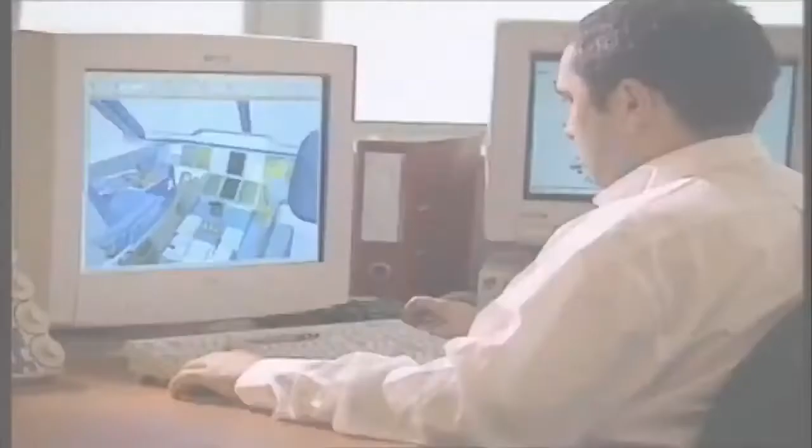It's a mega plane, bigger and heavier than any other passenger plane in the sky. It will hold more people than any commercial jet flying. Designers have spent billions. Now is the moment of truth. Will the world's biggest passenger airliner survive its maiden flight?

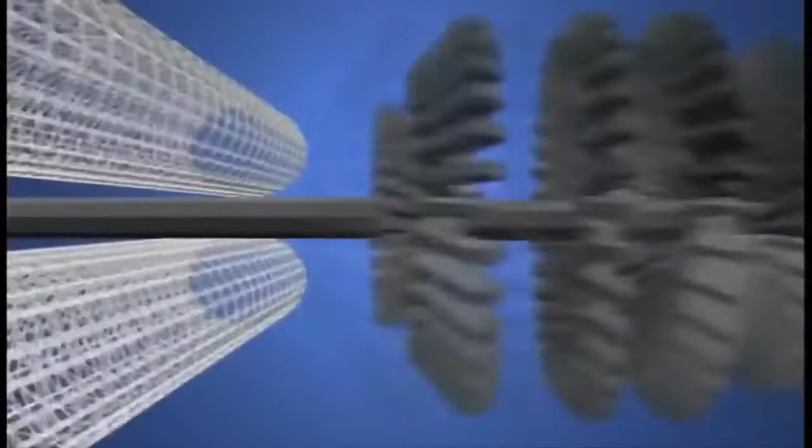An early spring morning, clear skies and a light breeze over southwestern France. Crowding the fields that flank Toulouse International Airport, 40,000 spectators, backpackers, campers and journalists from around the world. All vying for the perfect spot to watch the maiden flight of the Airbus A380, the largest passenger plane ever built.

It's 73 meters long, 7 stories tall at the tail, almost 80 meters from wingtip to wingtip. Heavier, longer and taller than a 747, with 2 full levels of seating, enough to hold over 550 passengers.

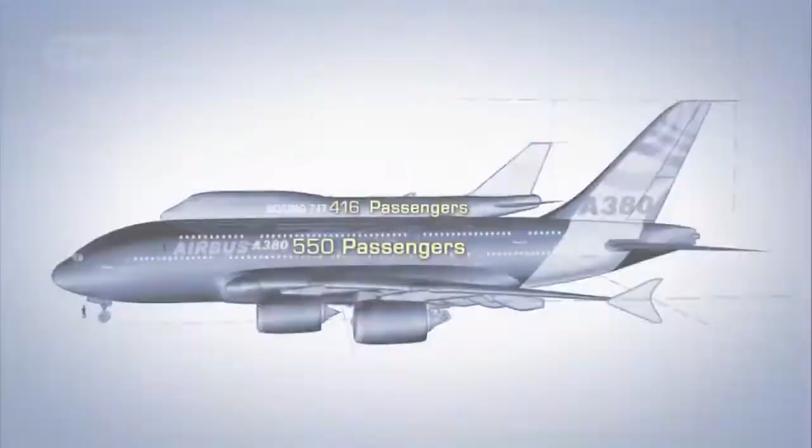Getting this monster off the drawing board required new, super lightweight materials, 4 powerful new mega-sized engines, massive new factories across Europe, and a computerized flight control system more sophisticated than any other in commercial aviation.

This moment is the biggest gamble that the company has ever taken. A $12 billion investment, the company's entire future, and the lives of future passengers all ride on the success of this historic test flight.

Alongside the runway, a hush settles over the crowd as the megaplane comes into view. Gradually, it gathers speed, accelerating to reach its takeoff velocity of 269 kilometers per hour. Then, as it nears the end of the runway, the moment of truth. The massive nose tilts skyward. A sliver of daylight appears beneath the rear wheels, and the Airbus A380 takes to the sky for the very first time.

The engineers and technicians in the crowd breathe a collective sigh of relief. Their baby is flying. The question now is, does anyone want a plane this big? Will the unprecedented size prove a boon or a boondoggle? Is this super jumbo the future of commercial aviation? Or the biggest white elephant since Howard Hughes built the Spruce Goose?

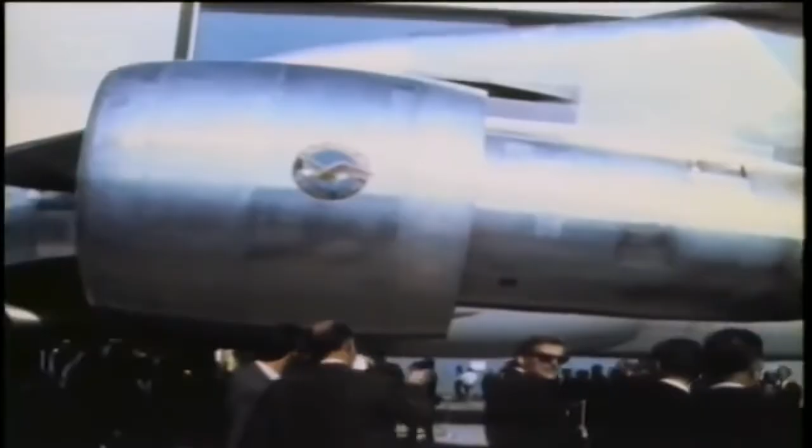1969 was a year of technology firsts. That year saw the arrival of 2 exotic new airliners. Boeing rolled out the 747, the first double-decker passenger plane, larger and heavier than any other. Powered by 4 Pratt & Whitney JT9D engines, providing a total of 186,000 pounds of thrust, the plane had enough oomph to carry more than 400 passengers and their baggage, more than double the capacity of the 707. The plane wasn't an immediate hit, but eventually, it took off.

The Concorde is here. That same year, Aerospatiale and British Aircraft Corporation, the precursor to Airbus, introduced the Concorde. While Boeing was bulking up, Europeans were getting small, but very fast. The Concorde traded capacity for speed. The plane carried only 128 passengers, but it could cruise at twice the speed of sound, cutting the trip from New York to London from almost 8 hours to just under 3.5. Both the 747 and the Concorde came to be the epitome of luxury in air travel.

These two differing visions came to symbolize a fierce rivalry between American and European aerospace giants. A rivalry that's only intensified with time, even as the business of air travel has changed dramatically. The Concorde, after years of financial difficulties and a devastating crash in Paris, has been grounded. And the 747 is now an aging workhorse, noted less for style and more for the sheer number of passengers it can pack between its wings.

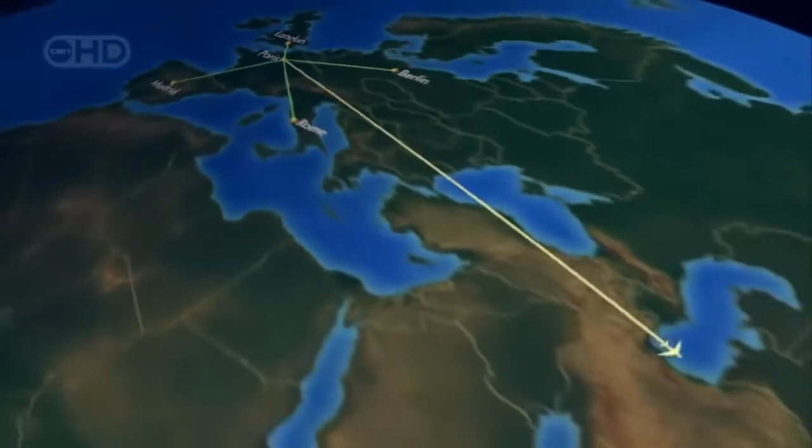The A380, though, is an altogether different order of beast. It's designed for hub-to-hub travel. Passengers will board a small plane near their home, then connect at a major airport to a larger plane, travel halfway around the world, and get off at their final destination. It's a strategy specifically designed to serve the most rapidly expanding long-haul routes in and out of Asia, and to cater to customers who appreciate a bit of pampering.

The plane's sheer size, with 2 passenger decks, is large enough for both standard seating as well as more luxurious features, like a lounge, a high-end shop, 2 staircases, even a waterfall. It's a breathtaking dream. But no one knew if such a plane could be built. Some argued that such a craft would be far too heavy and expensive to be practical.

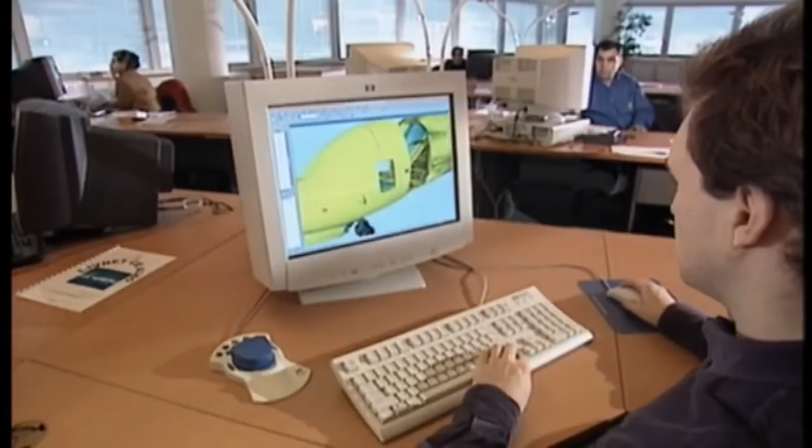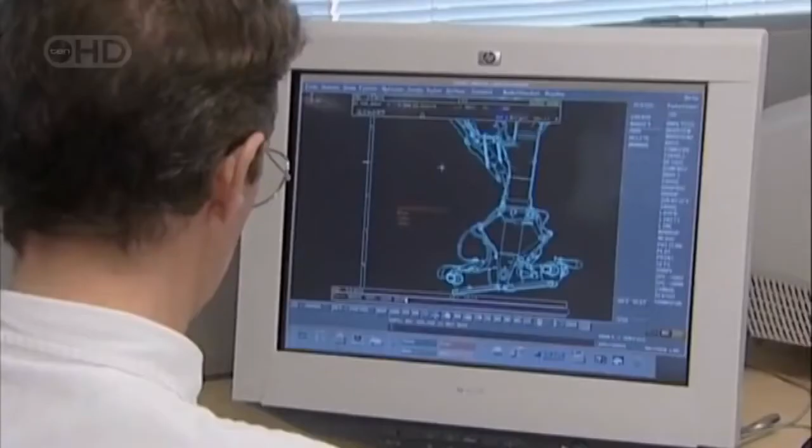But a tenacious and aptly named Airbus executive, Charles Champion, wouldn't take no for an answer. He encouraged his design team to think outside the box. Yeah, well, there were lots of weird designs. Some looked at the double bubble. One of their first ideas, the double bubble, a double-wide fuselage. It looked promising, but computer analysis showed that it would be far too heavy and not sufficiently aerodynamic. So Champion sent his team back to the drawing board, and eventually they came up with this history-making concept.

A full-length, double-decker passenger cabin, with a third deck below for cargo. Space-wise, it's the equivalent of 2 complete wide-body cabins, one on top of the other. The new plan called for an aircraft only 2.5 meters longer than Boeing's 747. It was 15 meters wider and 5 meters taller. But when they ran the design figures through the computer, they had a shock. The plane was far too heavy.

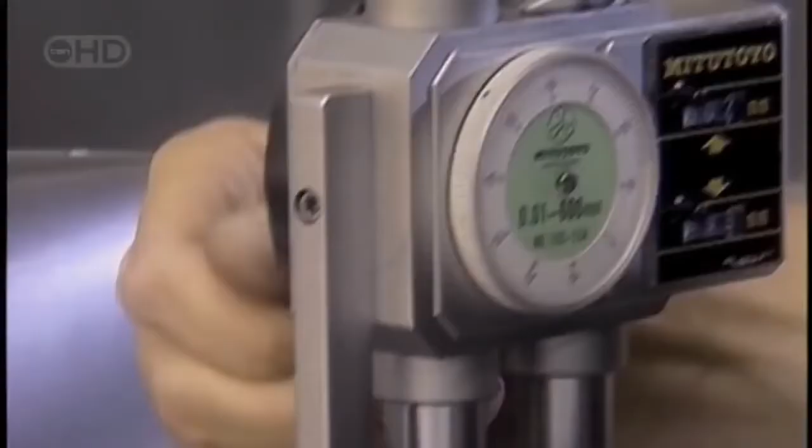And we came up with horrid figures, saying, my God, this is the weight of the aircraft, doesn't work. So what we did immediately at the launch of the program, or 2-3 months afterwards, we launched a very strong challenge on the weight. The team set out to bring the base weight of the aircraft below 277 tons. That's only about 50% heavier than the 747. An ambitious goal for a plane designed to carry over 100 more passengers and their luggage halfway around the world. Unless Champion and his engineers could find the means to beat that target, the dream would die.

Airbus engineers were faced with a design challenge that called for a lightweight plane carrying over 550 passengers at a lower cost per seat, not to mention quieter and less polluting than anything in the air. The design team knew they would have to rethink everything. They needed lighter materials, more powerful engines, larger wings, even bigger and smarter factories. Every component would have to be scaled up from supersize to mega size.

But even while the engineers were still scratching their heads over the details, the Airbus sales force was already hard at work, seducing customers with visions of the future. They created a full-sized interior mock-up that promised passengers in coach some relief from the grind of travel, with seats an inch wider than in other planes, and overhead bins 10% larger.

Each plane can also feature a new interior illumination scheme to eliminate the upsetting effect created when flight attendants suddenly switch on overhead lights. The kinder, gentler system in the A380 mimics the gradual transition from day to night and back to daytime again. These and other innovations make the plane distinctive, but it's the promise of opulent luxury that really turns heads. To help build excitement, computer programmers constructed a virtual showroom where airlines can bring to life their wildest design fantasies.

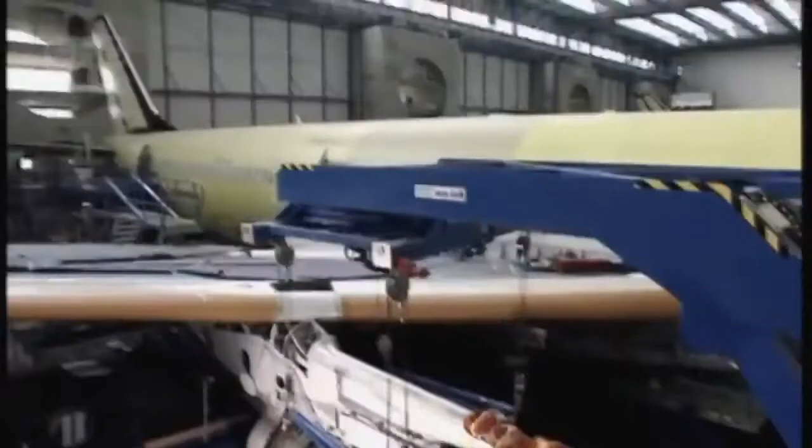Of course, no dream could take flight until engineers came up with a way to lift all that weight. In late 2000, builders finally settled on a design. For power, they would buy engines built by Rolls-Royce, capable of providing 30% more thrust than the engines used on the 747. Each massive power plant cost $15 million, as much as a ton of gold. Altogether, they account for almost 25% of the cost of the entire plane.

But if there's one thing this aircraft needs, it's thrust that won't quit. Each engine provides up to 80,000 pounds of force. Running at top speed, this mega guzzler sucks down a litre of gasoline every second. The A380 is designed for routine flights lasting 13 hours or more. That means when it's fully tanked for takeoff, the A380 carries a lot of fuel. 260,000 litres, 20% more than the load carried by the 747.

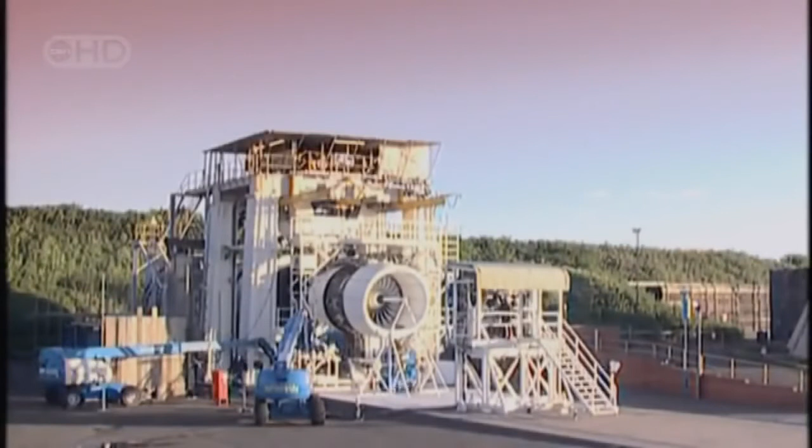Just imagine what would happen if anything threatened the integrity of one of those fuel tanks, like a catastrophic engine failure that sends shards of metal tearing through them. That's the nightmare that haunts engineers at Rolls-Royce, and they're about to destroy an engine to make sure it never occurs.

These 24 titanium fan blades suck air into the maw of this A380 engine. Each blade is 1 meter in length and weighs 15 kilograms. Lightweight, but super strong. When the engine is roaring along at full throttle, the blades spin at almost 3,000 revolutions per minute. The centrifugal force at the tip of each blade is equivalent to the weight of a 110-ton locomotive. If one of these were to break off and escape into the engine, it could wreak unimaginable destruction to the plane.

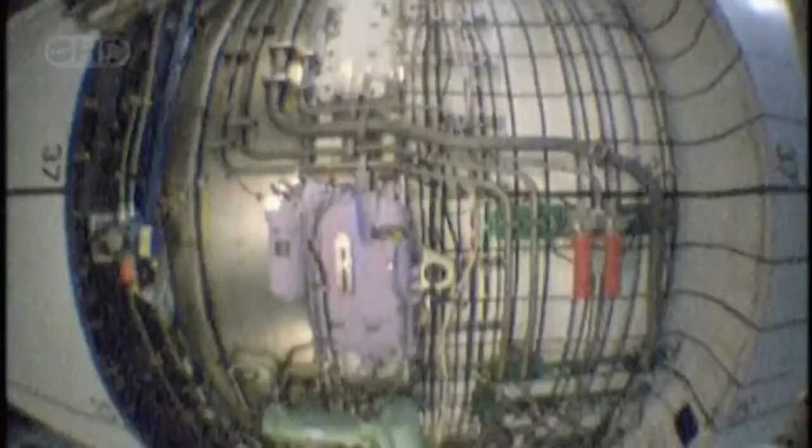That's why Rolls-Royce engineers are about to conduct an engine failure test. They're going to intentionally cause one of the fan blades to break off at full speed in order to prove that the engine enclosure can contain the damage without letting any metallic fragments escape. In the process, they will totally trash this $15 million engineering marvel, a small price to pay when the lives of over 550 people could be at stake.

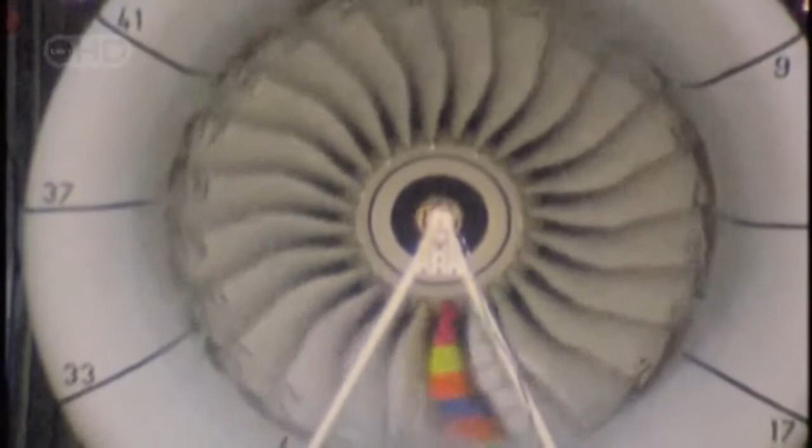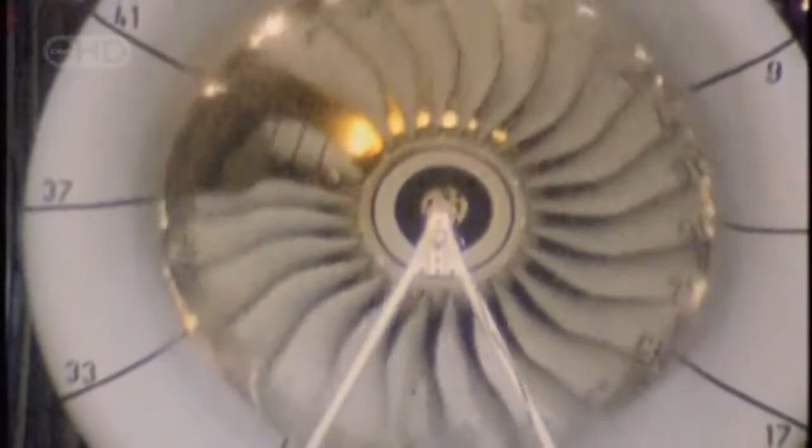A super slow-motion camera captures every moment in excruciating detail. The blades are striped to make visual measurement easier. When the fan is spinning at full speed, engineers send a signal to explosive bolts at the base of the multicolored test blade. Faster than even this camera can see, the knife-like piece of metal shears off and flies into the engine mechanism, wreaking havoc, but no fragments escape. The A380 engines are safe for flight, but there are many more pieces to the puzzle. Every other major component would have to be designed from the ground up.

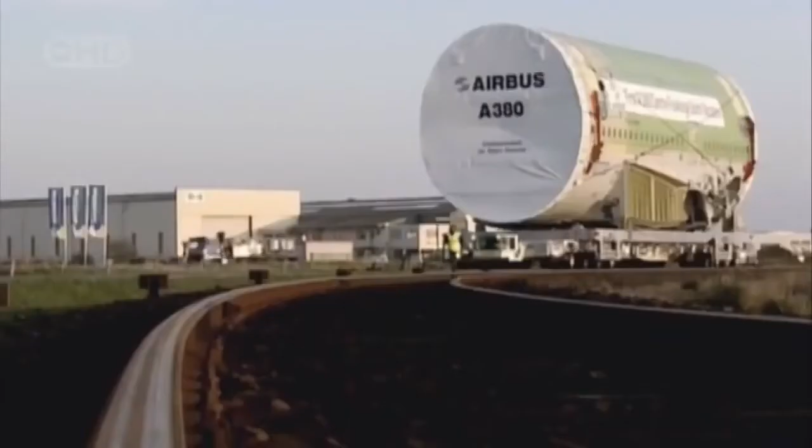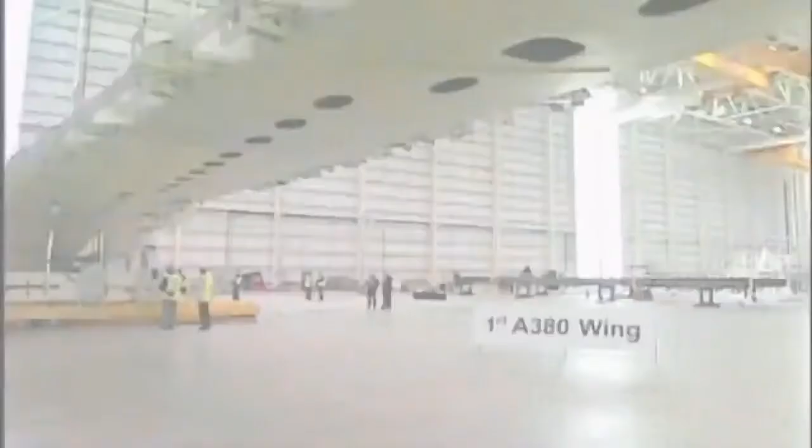Luckily, Airbus has already turned the world into a giant mega factory, with 1,500 suppliers and facilities used to build its existing planes, scattered over 30 countries, yet tightly linked by an advanced communication and transportation network. To assemble the hundreds of A380s the company hopes to sell in the coming decades, planners settled on 5 countries to build the major components. Wings in Wales, engines in England, the fuselage and vertical tail section in Germany, the horizontal tail section in Spain, and of course France, where all the pieces came together to assemble the finished plane.

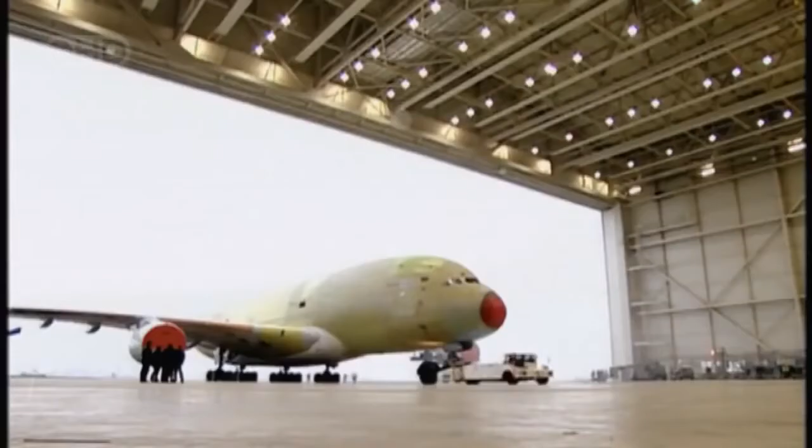The process begins in Wales, in 2 huge new wing factories, built to assemble the largest and most structurally complex commercial airplane wings ever designed. 32,000 components, shipped in from every continent except Antarctica. The wings on the A380 are true mechanical marvels. They provide flight control and enough lift to carry the fuselage, plus the 4 supercharged engines, each weighing nearly 6.5 tons. And with 260,000 liters of fuel loaded inside 10 interior locations, the wings are also flying fuel tanks. They're one of the most critical structural components in the entire aircraft.

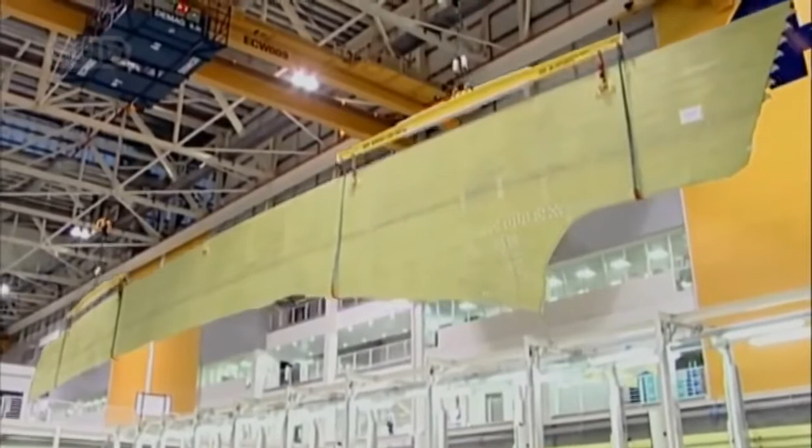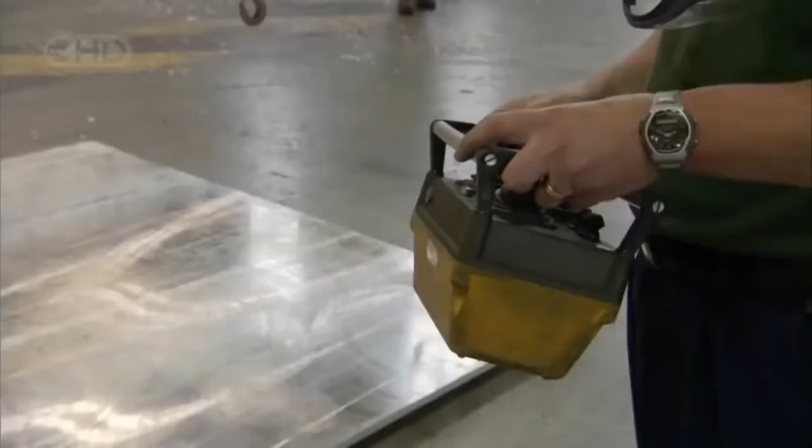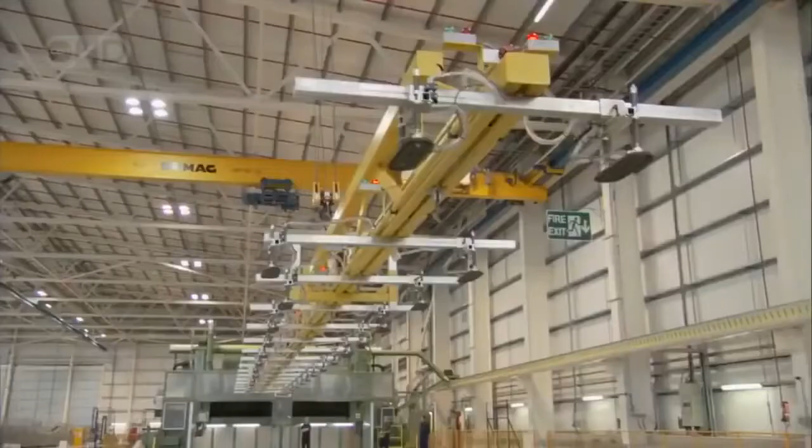The precision construction process begins with sheets of aluminium. Destined to be shaped into the 10 panels that cover each wing, each piece has its own shape and weight requirements. To whip one up, just follow 3 not-so-easy steps. Shave it, shape it, then bake it. This 34-meter-long slab of aluminium weighs in at 5 tons. Way too heavy for the wing panel it's destined to become. In its final form, it will weigh close to 1 ton. So off it goes, to get the aerospace version of a tummy tuck. Overhead cranes use 32 powerful suction nozzles to lift and transport each aluminium slab.

Tim Fernifer carries the burden of responsibility. Using a remote-controlled steering device, Tim guides the 5-ton piece of metal across the factory floor, but he can't do it alone. His team must watch the motion of the wing panel throughout the ride.

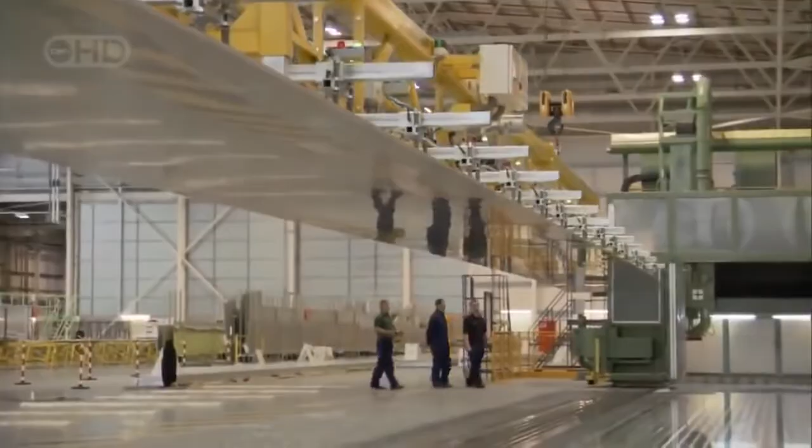You've got to be particularly careful when I'm handling it. I can't see down the other end, so I need another pair of eyes down the other end. It's just health and safety issues. You have to watch, make sure everybody's out of the way when it's actually moving. It's a dicey ride across the factory floor before the huge sheet can settle safely into position.

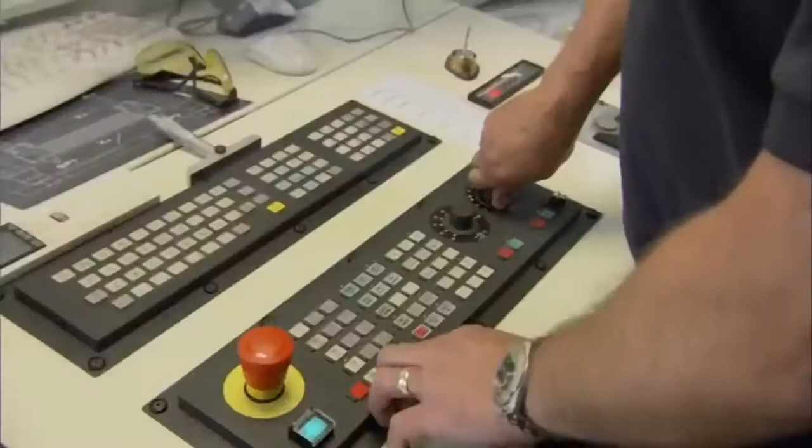A milling machine 40 meters long. Like an oversized cheese grater, the precision cutting head slowly cuts back and forth across the surface of the wing, painstakingly shaving the aluminium until the panel shape matches the 3D contour map stored in the machine's computer. The process takes up to 3 days. It eliminates 75% of the panel's weight while maintaining its strength.

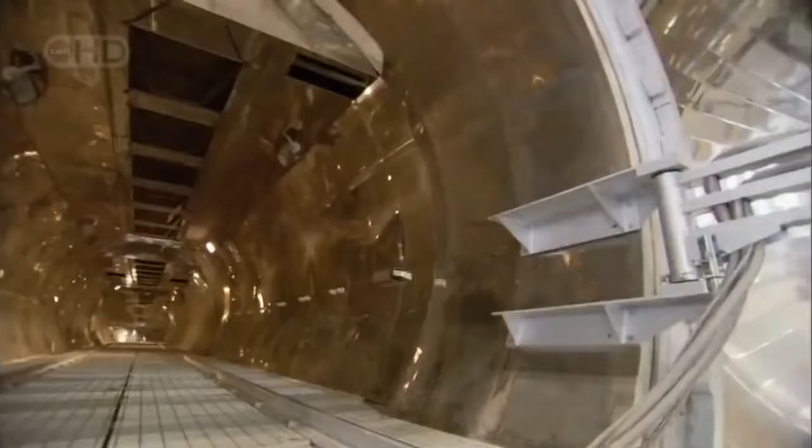Then it's ready for the oven, one of the world's largest pressurized heat chambers, 42 meters long, almost 6 meters wide. Technician John Massey has cooked plenty of wings for smaller Airbus planes, like the A320. It's a challenge to see it go from the size of the 320 to the size of the 380. It's a huge, huge jump. The A380 wings are 50% larger than A320 wings. That means a 50% greater chance of error in this critical process.

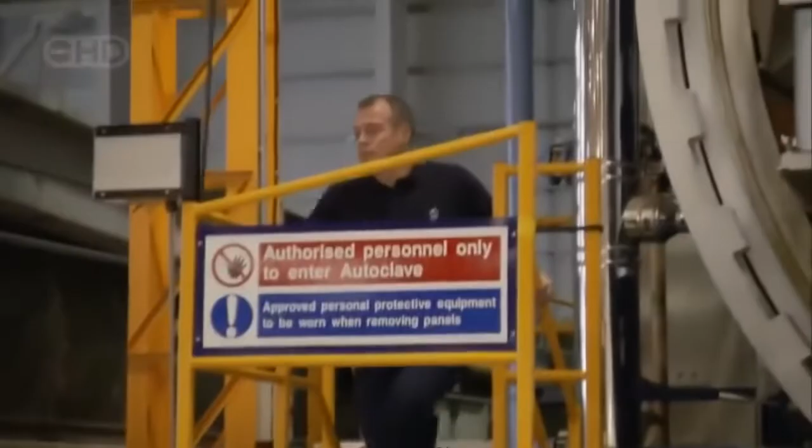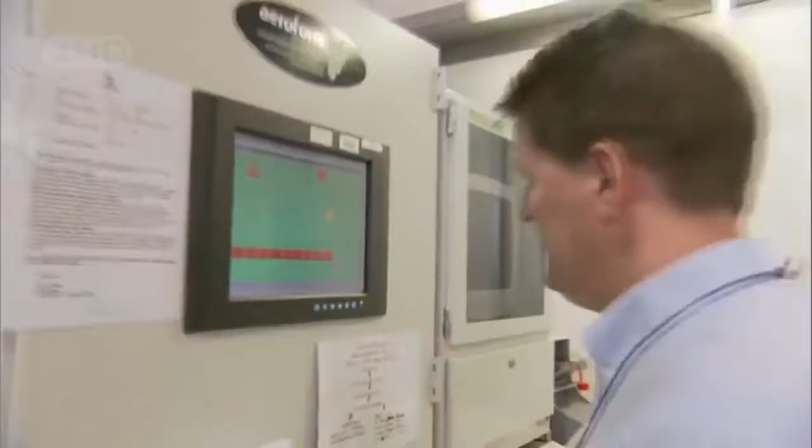Baking requires careful setup. First, Massey and others place the segment in a special metallic form. Then they vacuum seal the entire assembly with a massive piece of plastic shrink wrap to protect the metal from contamination. Inside, the heat must be uniform across the entire panel, 150 degrees centigrade, with no room for error.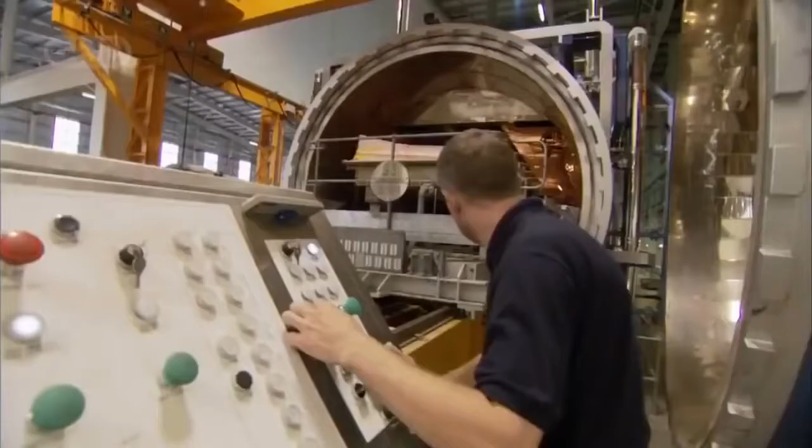We try to avoid any changes in the vacuum or the temperature, so the temperature must remain constant right throughout the process. It must maintain within 3 degrees, otherwise the run is invalidated. After 24 hours, the panel is ready. Specially equipped vehicles rise up and move into place in front of the oven.

All eyes are on the plastic protecting the wing panel. If it breaks, the aluminium wing piece is compromised. A disaster. The entire wing panel would be worthless. If the bag bursts, it means starting the job again from scratch. Anxiously, they scan the surface for any breach. At last, the wing is cool enough to touch. And good news, the bag appears to be intact.

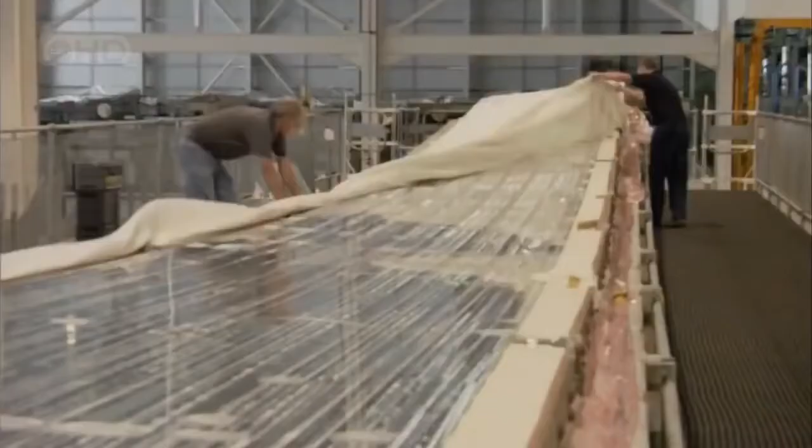Finally, the wing segment arrives in its docking bay. Here, the technicians first remove the plastic and cloth wrap. Now begins the tedious search for flaws. John's boss, Gareth Williams, arrives to inspect the piece. He retrieves small metal rods that were baked onto the top of the wing panel. Each of these cylinders tells an important story about future safety.

These are test pieces which are made of the same material as the wing panel, and we use them to confirm that the heat process that this part's just gone through is correct and it's to the right specification. When this testing phase is complete, Gareth and John get the okay to move the wing to its next destination.

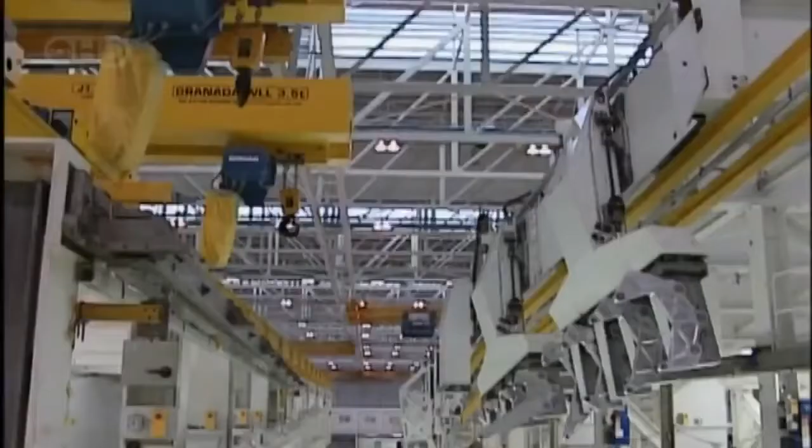The nearby wing assembly plant, an enormous brand new factory located just up the road. It's one of Britain's largest industrial buildings built in this century. It's nearly 85,000 square meters in area, equal to 12 full-size football pitches. This is where the builders attach the aluminium skin panels to the wing skeleton. George Lee guides his team through the tricky assembly process.

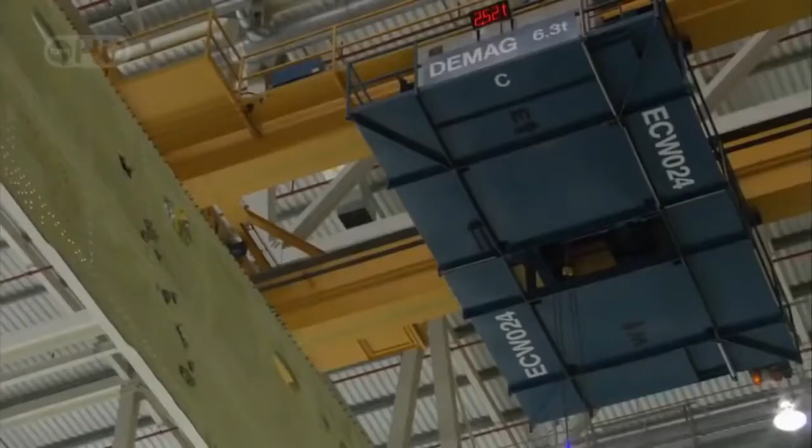Today they're preparing to lift and place one of the largest of the 10 aluminium panels, 34 meters long and weighing in at more than 1 ton. Size is a great challenge because everything requires some form of overhead lifting. Nothing can be lifted manually, so virtually everything requires overhead craneage movement, and therefore the management of the craneage system is very, very important. The panel hangs like a huge guillotine, suspended over the factory floor. But that's not all that's hanging over the assembly team's head.

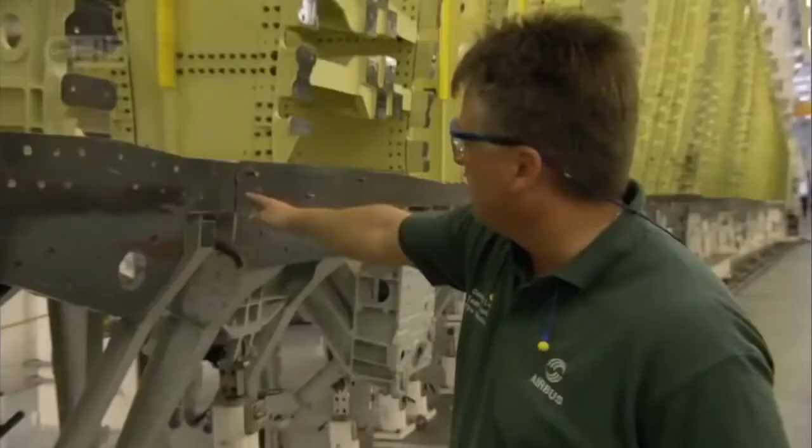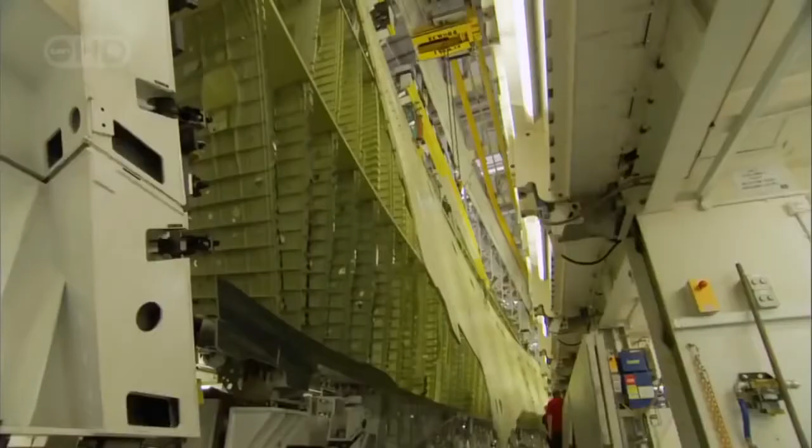Time is running out. Along the edges of the partially constructed wing, builders have applied a sealant that'll help to ensure the integrity of the fuel tanks. The sealant dries quickly within hours. The team must fit the wing panel into place before the sealant dries, or the wing could be defective. This time they're cutting it close. The only concern I've got is the time factor. If they don't succeed, the team will have to scour the sealant off the aluminium surface and start the whole process again.

Finally, the panel settles into place. 1 down, 9 to go. It can be stressful, yeah, it can be stressful. At certain times, it's an enjoyable job, because when it actually all works and goes together, it's quite enjoyable. You've made it an achievement.

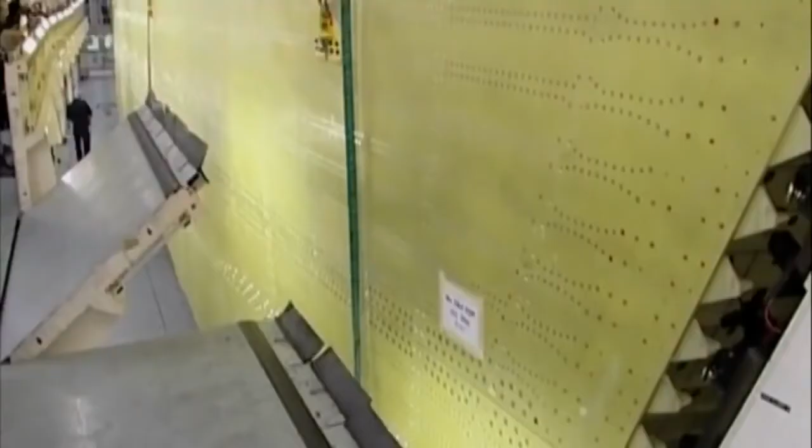Now it's time to glue and bolt together the pieces, like building the world's biggest model airplane wing. This part of the process remains a carefully guarded trade secret. The company wants our cameras off. No cameras.

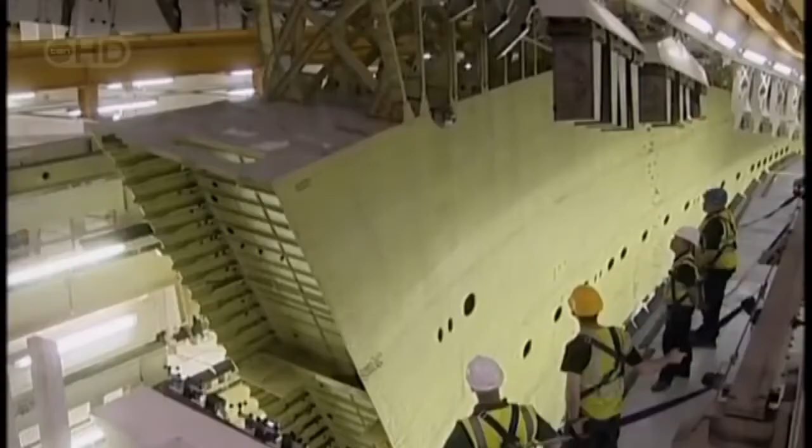The secret assembly process inside the jig will take nearly 4 weeks to complete, but it takes more than a wing to make a plane. All across Europe, more factories are coming online, pumping out body parts of this giant Franken plane. But not everyone is happy to see this kind of progress. Some locals in Germany are up in arms over Airbus's ambitious plans.

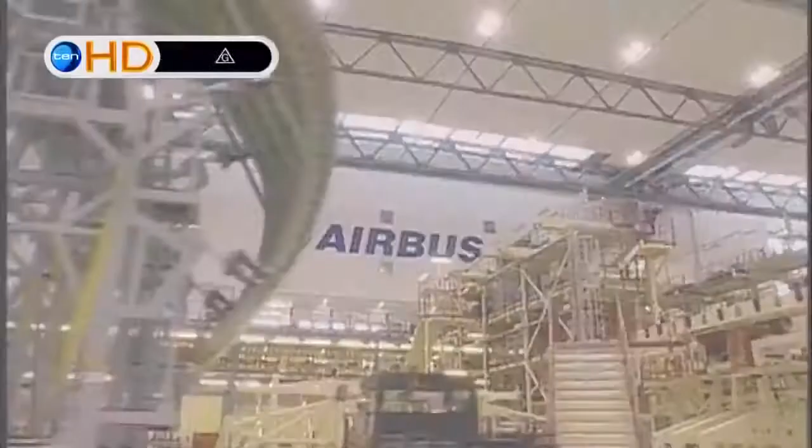This is the newest Airbus factory in Hamburg, a megastructure big enough to house 4 A380s side by side. Airbus has been building airplane fuselages in Germany for more than 30 years. But with the announcement of the A380, the company needed to massively expand the site and send finished planes here to get tricked out on the inside and painted on the outside.

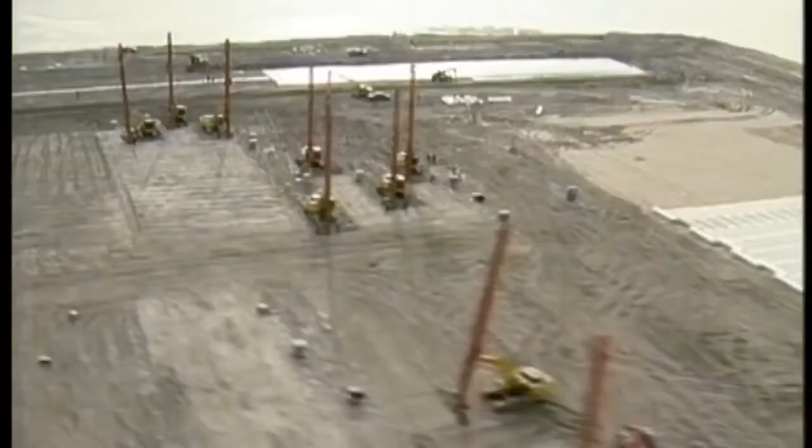No matter what the customer wants their plane to be, a 550-seat cattle car, a high-class hotel in the sky, or even a heavy-duty freighter, this is where the seats, the carpets, the stairs, and yes, even the bar and the waterfall will all be installed. The expansion plan called for 3 new buildings and a longer runway to accommodate the massive plane, but there was a problem.

Airbus's main factory here sits alongside Germany's Elbe River, smack in the middle of Europe's largest tidal wetlands. It's a very special area because we have there the influence of water from the country and tidal water from the sea. So we have a mixture of sweet water and salt water. This fragile ecosystem is home to 70 species of migratory birds. Now 71 if you count the Airbus A380. Airbus wanted to fill in 140 hectares of pristine wetland, and local activists cried foul.

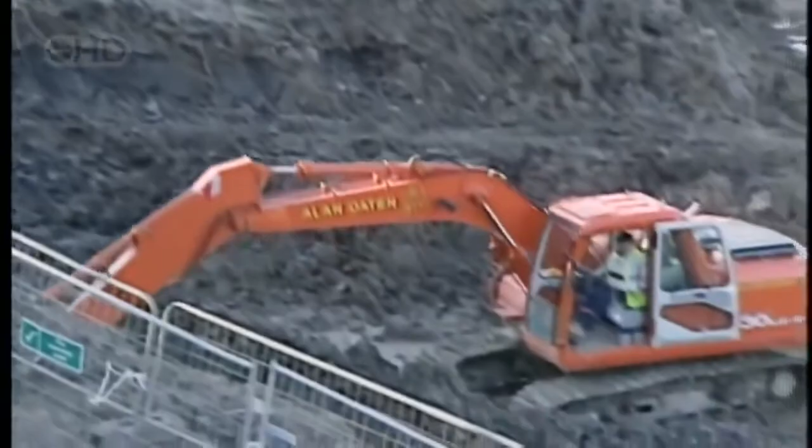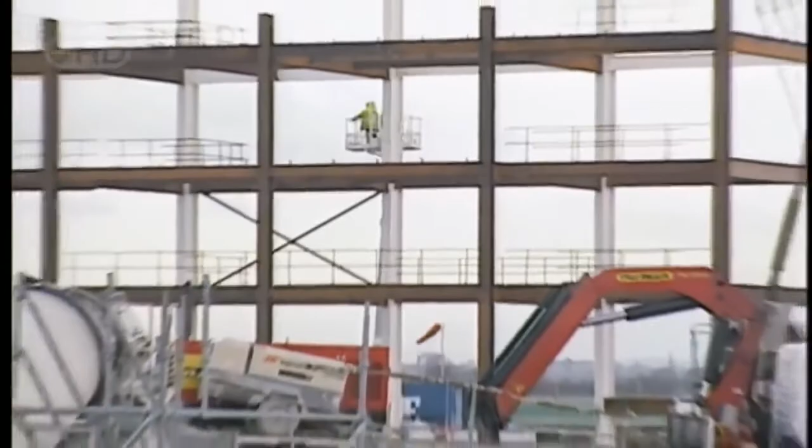A pitched battle in the courts and demonstrations in the streets delayed construction of the factories for over 2 years. But eventually, local and national politicians who wanted to bring business to the community intervened. The factories went up. One got busy building fuselage segments, but the other 2 stand nearly empty. More lawsuits still block the Hamburg facility from taking delivery of all of the planes it's meant to finish. Unless the company wins in court, it may have spent a few $100 million building a factory of little use.

The problem lies with the runway. Airbus needs a longer runway to accommodate a heavy-duty cargo version of the A380. We need the runway extension in Hamburg for the pilot to test the performance of the aircraft. And he only can test this when he has an aircraft with a weight which is approximately the weight you normally have in cruise altitude and a normal scheduled flight.

That plan to lengthen Hamburg's existing runway has met with considerable resistance from locals. Their concern: extending the runway will bring the tarmac to within just 450 meters of village orchards, and uncomfortably close to a Lutheran church that houses a priceless organ built in 1688. A delicate instrument that could be damaged by ground vibrations and wake vortices, turbulent bands of air similar to miniature tornadoes.

We have very precise information on the generation of these wake vortices, so small, let's say, tornadoes, wind generated by every aircraft, more or less, which can affect buildings and also persons close to the runway or close to the flight path. And we have predictions that we should expect occasionally winds up to Beaufort 12, which is about 130 kilometers per hour in the core, and these tornadoes will hit the church tower and the roof construction. Villagers may have reason to be concerned.

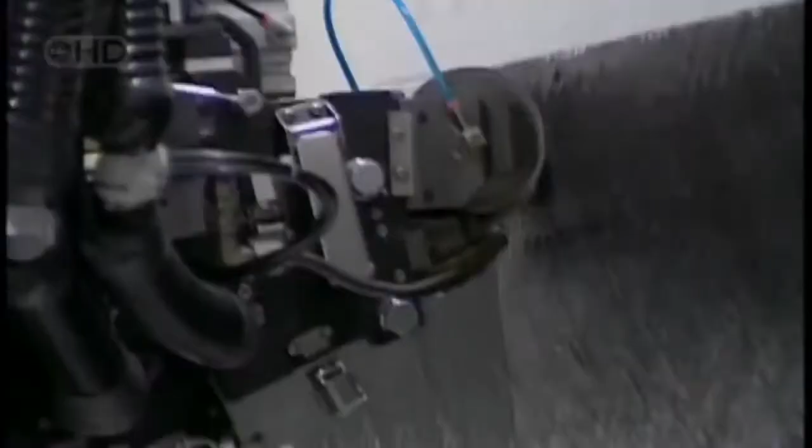The company is using a futuristic material to build the largest commercial aviation tail fin in the world. It's called carbon fiber reinforced plastic, and it's made out of the same stuff that gives diamonds their incredible strength. Carbon fiber is 6 times stiffer than steel and much lighter. It's the only option if builders are going to keep the weight of the plane below the target of 277 tons.

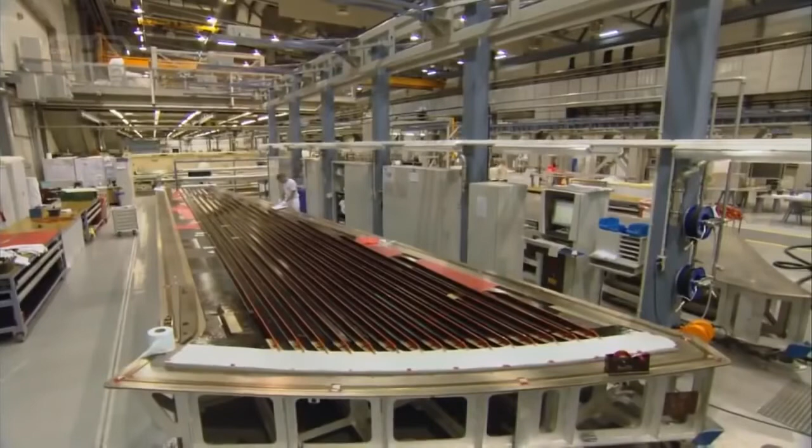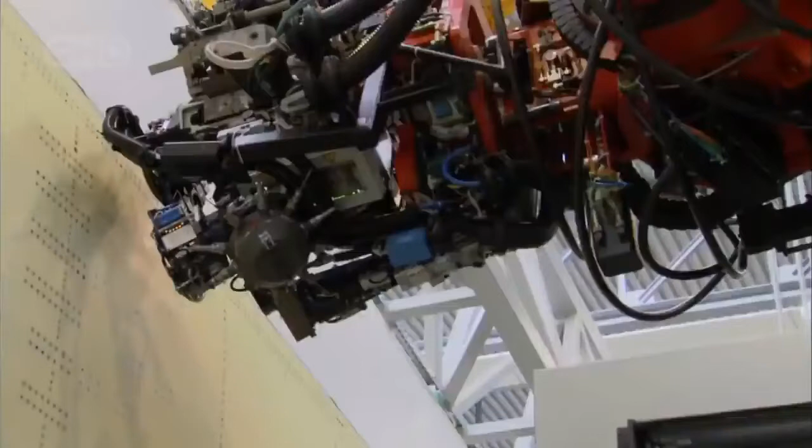Unlike forged metal, carbon-reinforced plastic parts are actually woven, like cloth. Fabricating machines spin out tail panels by combining super-strong carbon fibers with plastic resin to create almost any shape the designers can imagine. After baking, strengthening, painting and drying, technicians join the lightweight panels to the tail skeleton with the help of this computer-controlled riveting robot. Working around the clock for a week, the robot makes 10,000 critical connections with tolerances no human can match. The integrity of the tail fin is crucial to the safety of passengers.

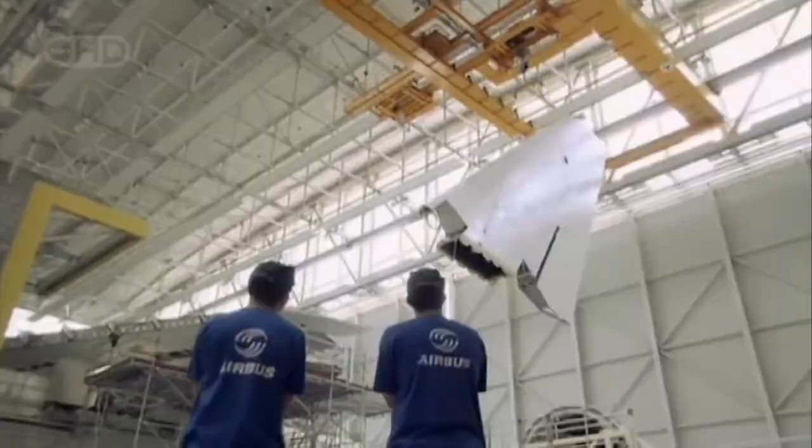It was the second deadliest crash in US history, and investigators made a disturbing discovery. It had been caused when the tail fin and rudder, made partly out of composite materials, sheared off as the plane accelerated. Investigators concluded that cockpit errors, not a failure of the carbon composite material, most likely caused the crash. And builders have applied the lessons of that catastrophe to the tail fin of the A380.

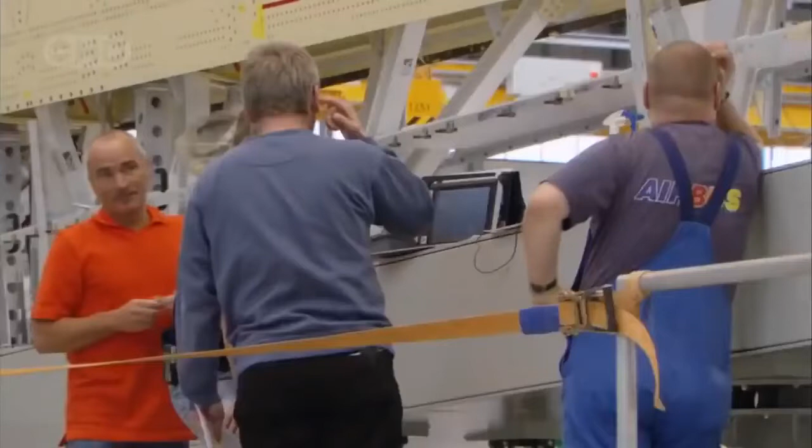But today, something's gone wrong on the factory floor. A lightning strike zapped the power supply, and now the precision riveting robot is dead in the water. We had a storm, a lightning strike. The PC failed and the hard disk was completely gone. Mother Nature has thrown a wrench into the works, causing a total crash of the system. It is electricity. Sometimes it happens. Normally we are protected, but it can just happen.

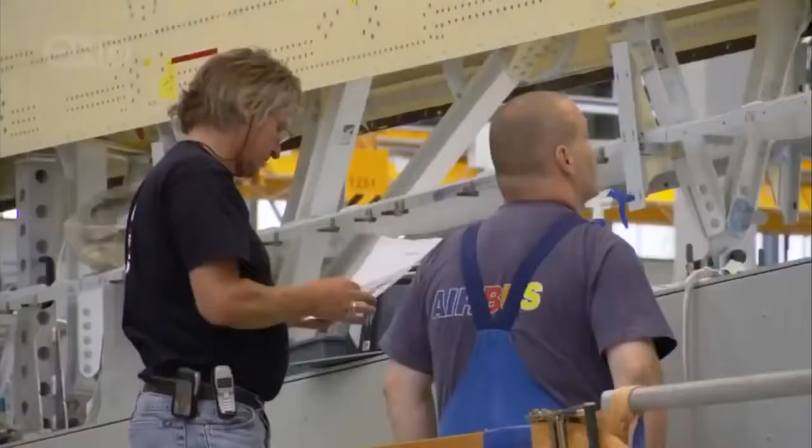Critical hours pass as Kai Baumgartner and his colleagues struggle to get the robot back online. If they can't fix the computer, they can't make the deadline set for finishing this tail fin. Kai and his team must find the problem, and quickly. By the end of the shift, the sound of riveting echoes through the factory once again. Kai is finally back at work, personally verifying that every one of the 10,000 connections is perfect.

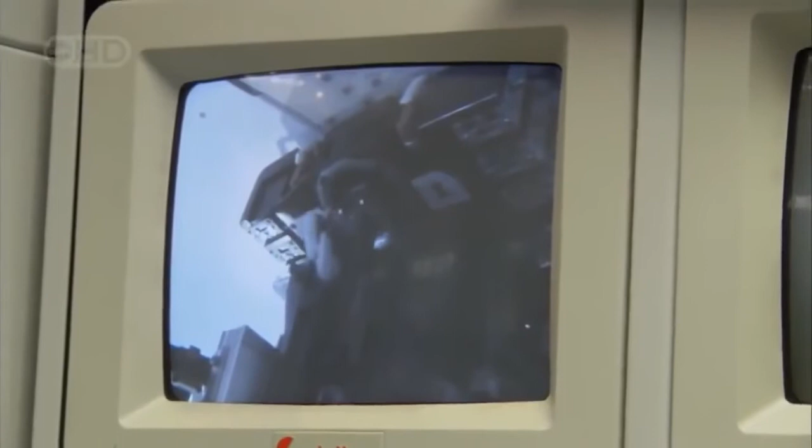A tiny camera positioned on the end of the riveting machine allows Kai to carefully examine each rivet, making sure to catch any abnormalities in the process. I make sure that the drill doesn't get stuck or any mistakes happen. I have my different systems here. It can happen that something is stuck or that an error occurs. It's a repetitive process, but Kai must remain vigilant to safeguard the lives of future passengers.

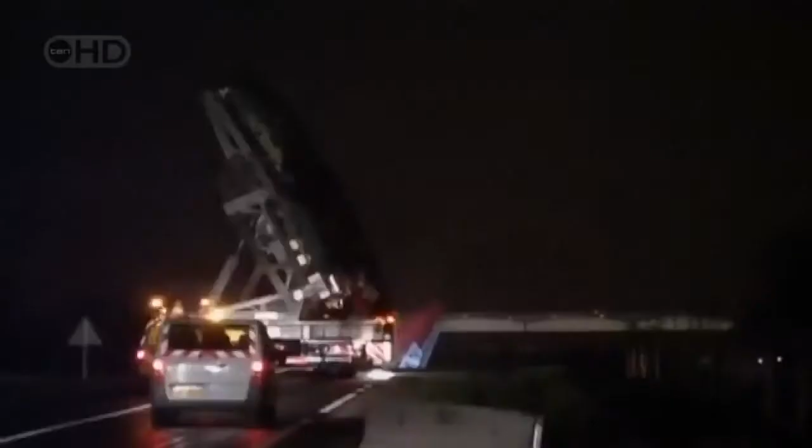Around the world, manufacturers and suppliers are putting the finishing touches on the components of the A380. But putting all the pieces together will be a logistical nightmare. Airbus's existing transport system, the custom-built mega-freighter called the Beluga, is too small to haul the A380 components to the assembly factory in Toulouse, France. So builders came up with a risky plan to haul millions of dollars of critical components by water and land.

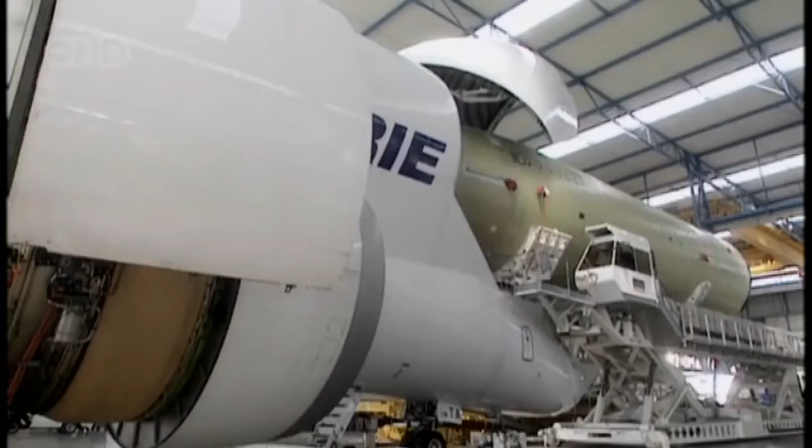Airbus had a problem. They needed to move pieces for the largest passenger plane in the world from factories all over Europe to their final assembly plant in Toulouse, France. For smaller planes, they could use the Beluga, Airbus's distinctive custom-built transport plane. The Beluga's cargo hold measures 7 meters high, 7 meters wide, and 38 meters long. Big enough to swallow the fuselage, wings, and tail sections of Airbus passenger planes like the 150-seat A320.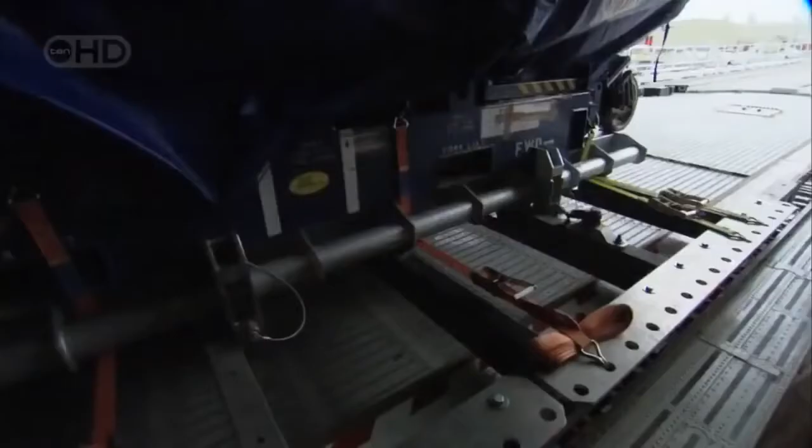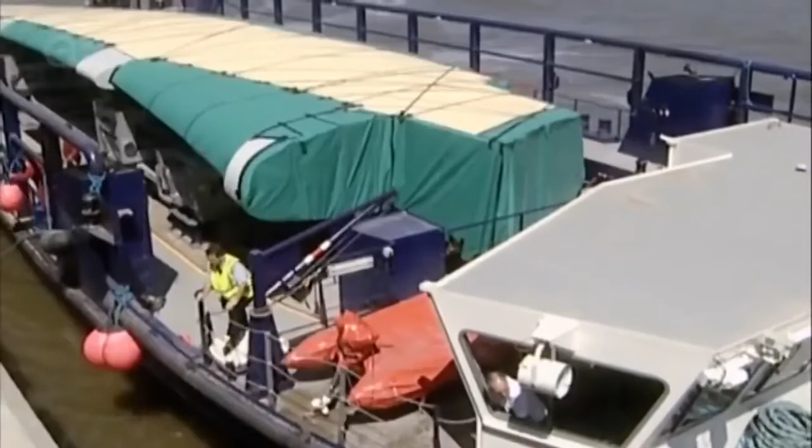But when Airbus decided to build the massive A380, the sheer size of the parts overwhelmed even the Beluga. The Beluga is far too small to carry the A380's enormous double-decker fuselage or its record-breaking wings. So to get their parts to the assembly plants, the company now had to move them by sea and over land, instead of a 2-hour ride in the belly of the Beluga. Parts for the A380 joined a days-long parade of specially outfitted ocean ships, river barges, and trucks.

Keeping this massive system on schedule is the job of Surface Transport Coordinator Philippe Nedelec, who has to keep it all moving fast. I like to say that I am a kind of conductor. I have to impose the tempo to everybody. Wings and fuselage arrive by sea in the port city of Pauillac in Bordeaux. From there, it's 96 kilometers by barge up the Garonne River.

It's a tricky bit of navigation to clear the historic Pont de Pierre Bridge, a prized landmark built by Napoleon almost 200 years ago. We have to cross a very old bridge. And at the beginning, the Bordeaux people were very afraid. What are these Airbus people going to do with our nice bridge?

To maneuver beneath the Pont de Pierre, Philippe and his team keep careful track of the tides and the weather. If they don't time their trip just right, if the water is too high or the currents too strong, they could collide with the bridge, destroying precious cargo and damaging a priceless piece of history as well. But waiting for the perfect moment isn't always an option.

Suppose we miss a call for weather condition or some other things, then the boat can miss a tide, so we can miss 6 hours. And with these 6 hours you can miss 1 week, because we cannot start the convoy, the road convoy, every day. It's not so easy. We cannot start when you want. Every pass under the bridge is a potential disaster. This time, they make it through, but just barely.

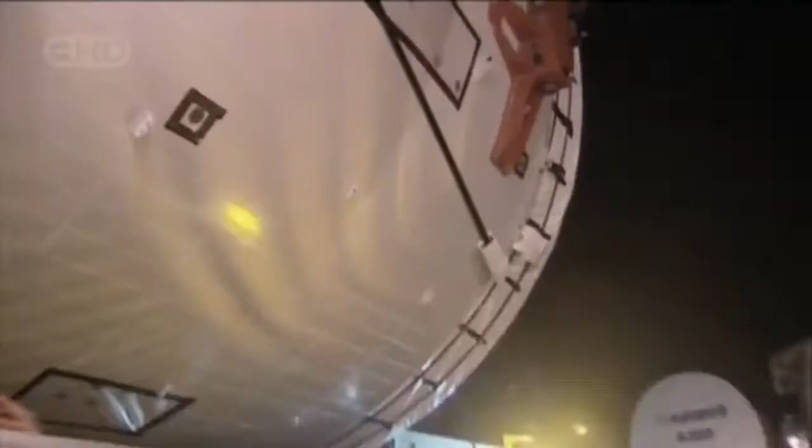So far, this roadshow has had an exotic appeal. But will they still be clapping when convoys like this grind through town once a week? Ultimately, that's the pace Airbus will have to keep if they're to meet their manufacturing targets. At last, the convoy arrives at its destination, the final assembly line, the nerve center of the entire operation. The final assembly line sits on the edge of Toulouse's Blagnac Airport.

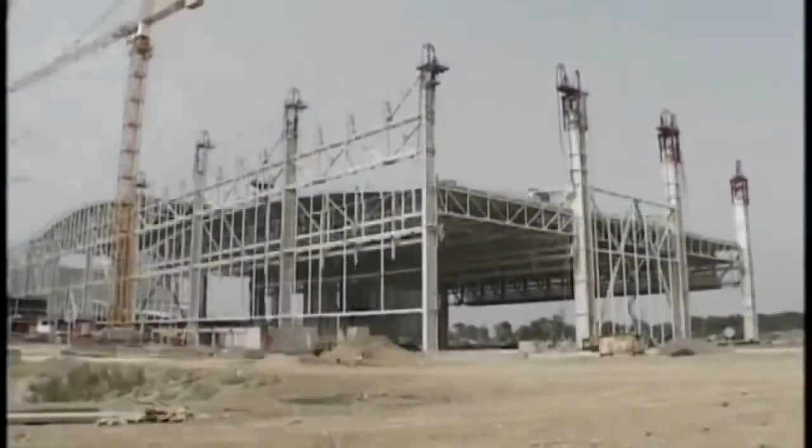As with all A380 factories, this one is huge. 500 meters long by 250 meters wide and 15 stories tall. 32,000 tons of steel, enough to build 3 Eiffel Towers. It's in here that the massive plane finally begins to take shape, with the help of a gargantuan assembly structure known as a jig. According to Julien Pouillou, there's nothing else like it in the world. We're standing in front of the biggest jig that is used in the world to assemble an aircraft. This is the Station 40.

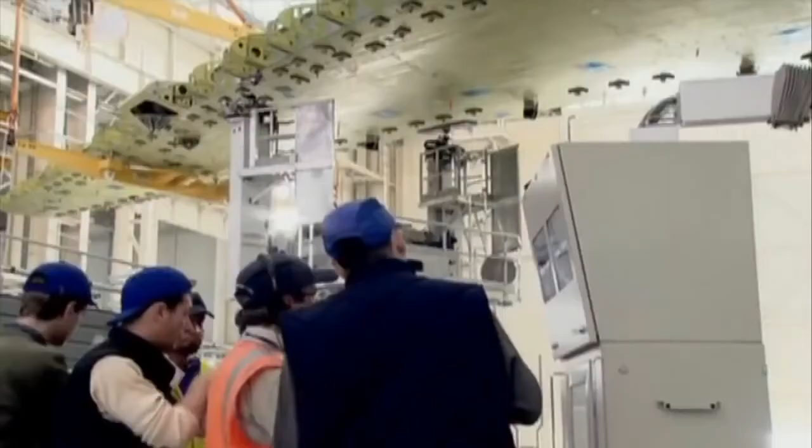Station 40 is where the fuselage, wings and tail all come together. The one-of-a-kind jig stands 5 stories tall, weighs 1,200 tons, and comes equipped with 4 elevators to carry workers to their stations. This is where theory becomes reality, as pieces made all over the world finally come together. If there's been any error, if the pieces don't measure up to spec, or if the joints don't come together just right, within millimeters, the huge passenger craft won't be fit for flying.

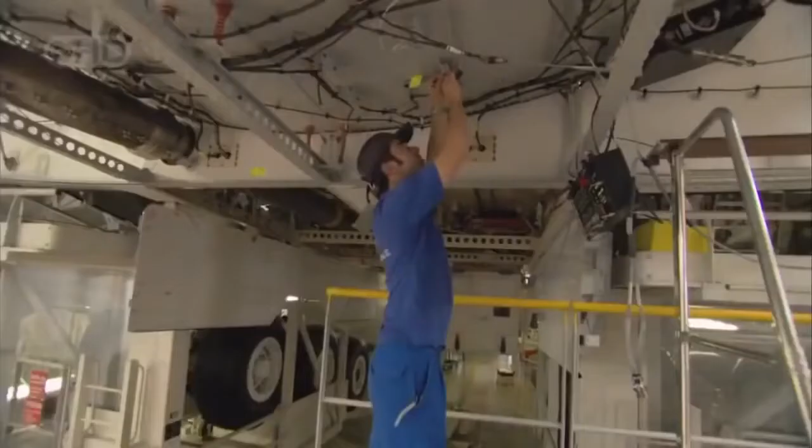The lives of future passengers depend on the steady hands of these craftspeople and engineers, working inside the mighty Station 40. The challenge is for us to assemble those pieces together at the same time, because we have a lot of workers working in the same area at the same time, and they have to do all sorts of completely different tasks. One has to take care of the wings and one has to take care of the fuselage, and so they are not doing the same job, but they have to do it together.

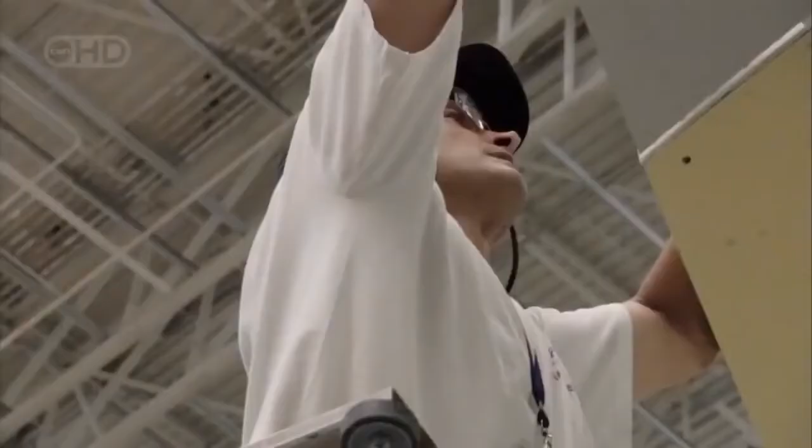Work on this plane now proceeds at an intense pace. It'll take 4 weeks to complete the assembly. Once the plane has been released from Station 40, it moves through a pair of 100-meter wide sliding doors and makes its way to the systems hall. Inside this gigantic space, 3 A380s can sit side by side comfortably, while technicians swarm over the superstructure, testing the electrical, hydraulic and plumbing systems that'll bring the dormant aircraft to life.

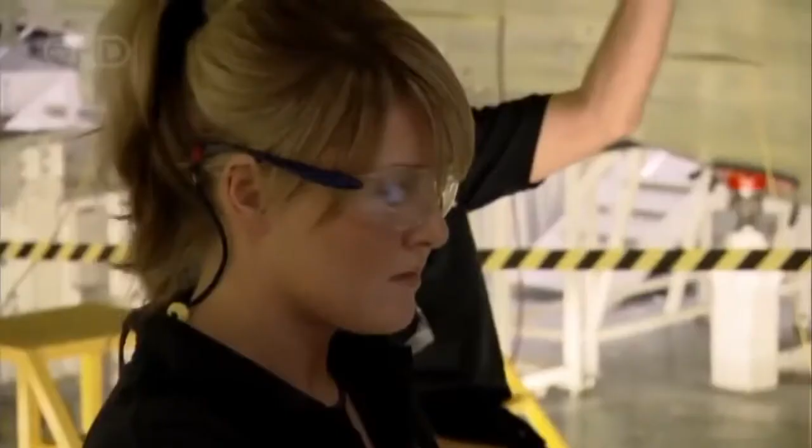Building just one A380 is a massive job, but for Airbus to survive, they're going to have to speed up production to a breakneck pace. Eventually, the Station 40 team will have to crank out a defect-free plane every week.

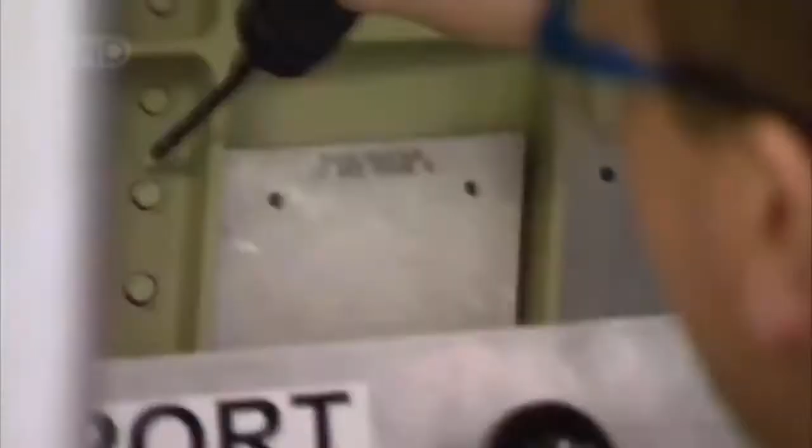But before that can happen, the plane must be proven airworthy. Now all eyes are on the skies over southern France, as the gathered crowd wonders, will the A380 survive its maiden flight? At Blagnac Airport in Toulouse, 40,000 people anxiously scan the skies, searching for some sign of the A380. All flights in and out of the airport are put on hold. The skies over Toulouse are eerily quiet.

Nearly 4 hours have passed since takeoff. If all goes as planned, the huge airliner should swing into view at any moment. But if there's a problem, the flight crew will quickly discover how well their training has prepared them for disaster. Much of that training took place using powerful computers, programmed to mimic the behavior of the A380. That's the theory anyway.

In a simulator like this one, with a computational engine 500 times more powerful than a home video game console, photorealistic visuals help pilots to get a feel for the plane. Despite the A380's unprecedented size, Airbus engineers have tried to make it fly like any other airliner. 100 knots. The task of testing the verisimilitude of the simulator experience rests on the shoulders of pilot Claude Holbeck.

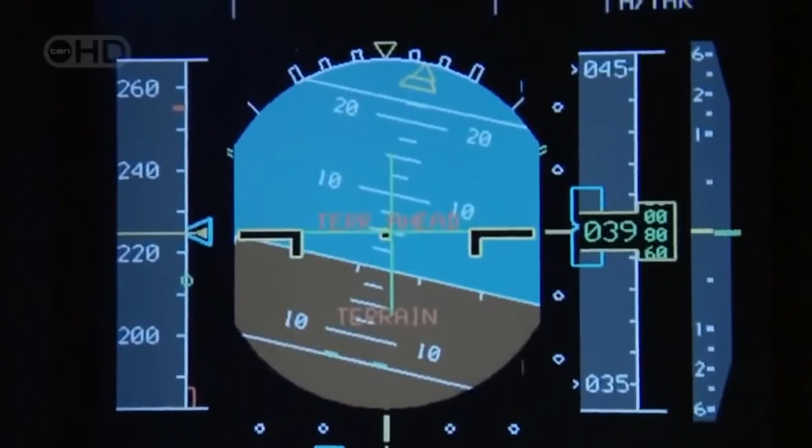It would take a lot more than an engine failure to knock this monster out of the sky. But test engineers are nothing if not imaginative, and they've loaded their simulators with more than 400 different catastrophe scenarios. Everything from a fire in the cargo hold to a devastating lightning strike. The exercises are useful, but no computer can simulate the awesome responsibility of shepherding 550 passengers through the stratosphere. The challenge is to fly with many passengers. I think this is the greatest challenge, yes.

Outside, all eyes are on the sky. The wait is excruciating. Then, a glint of reflected light. At last, the mega plane sails into view. Eager reporters and photographers race to the edge of the tarmac to record this historic moment. A showy flyby excites the crowd. Makes a steep turn, lines up with the runway, begins final descent. Then, at long last, touchdown.

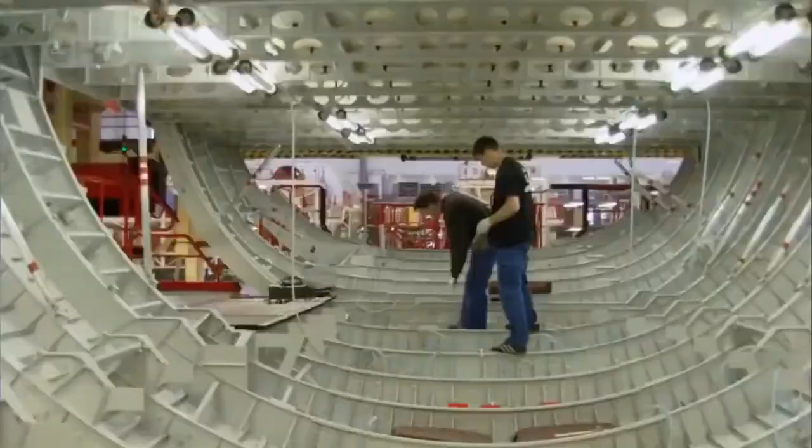They've proven that the plane can fly, but that may have been the easy part. At the time of the test flight, Airbus had 154 orders and still needed 96 more just to break even. To fill those orders, they must dramatically increase the speed of production and convince the world's airlines to pay nearly $300 million for each plane.

But even while potential customers were lining up to drool over decor, and the engineering team was still basking in the afterglow of the successful first flight, Airbus surprised the industry when it unexpectedly announced a 6-month delay in the delivery of the first aircraft. Early customers who took the risk and put down deposits before the first plane had ever been built are not happy. Some analysts believe the plane is still heavier than Airbus promised, but Airbus insists that the delay is merely routine.

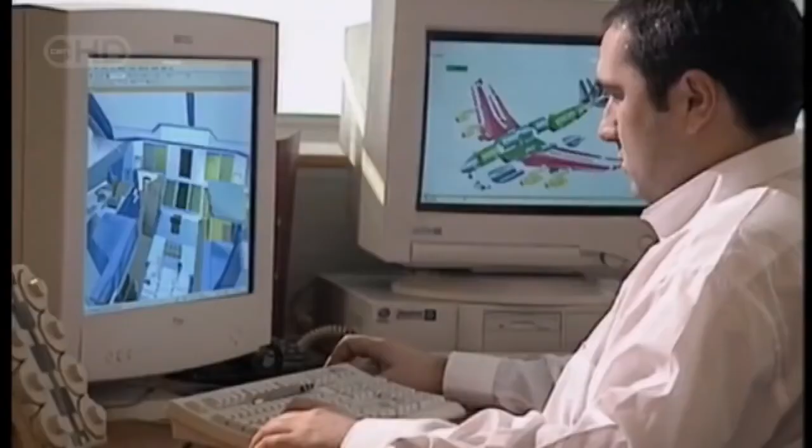The real achievement will be when the customer says, "Great, this is what I expected, I love it, give me more." If the last 40 years in the history of aviation is any guide, and more people fly further and more often, year after year, then Charles Champion's daring bet may well pay off, and the A380 just might become the flagship of commercial aviation well into the 21st century.